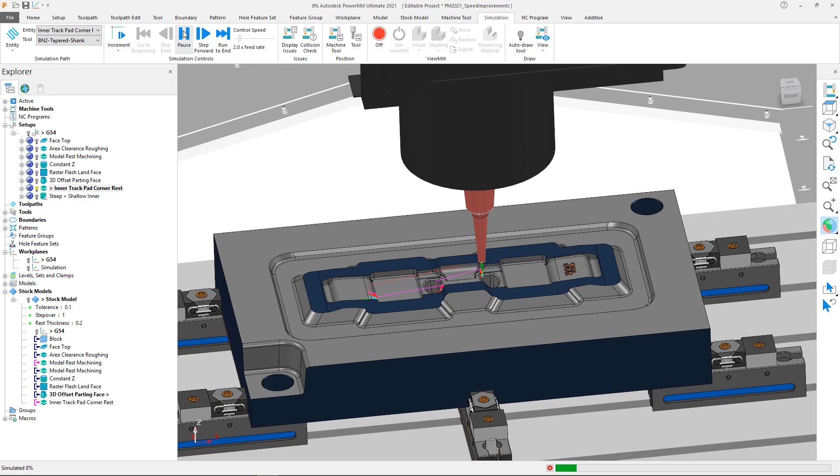For this example, we will be using a simple forging die for a trackpad, the size of which is 600mm in X by 350mm in Y by 96mm in Z. And in this project we have 8 toolpaths in the setup, 3 of which we will be calculating in this tutorial in order to compare their performance.

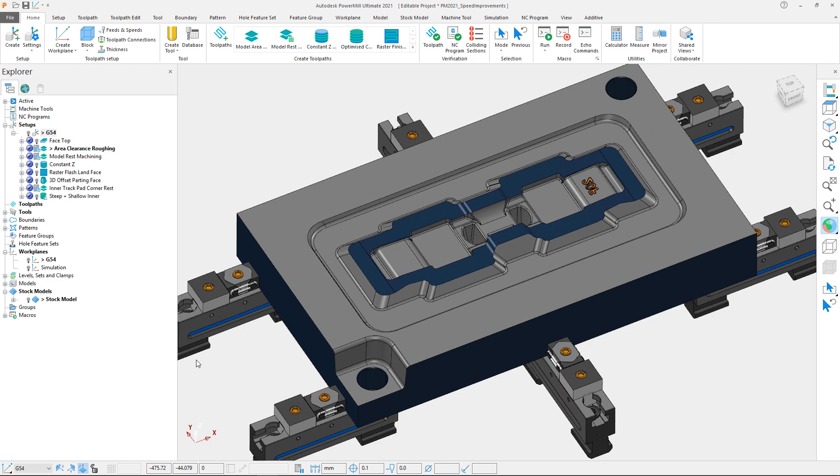We will be making a side-by-side comparison between PowerMill 2021 and PowerMill 2020.0. In this instance, both versions have been run independently on the same Lenovo ThinkPad P71 workstation laptop, which has a quad-core Intel Xeon E3 processor, 64GB of RAM, and an NVIDIA Quadro P4000 graphics card. Here we have both versions of PowerMill. Version 2020 is on the left, and version 2021 is on the right.

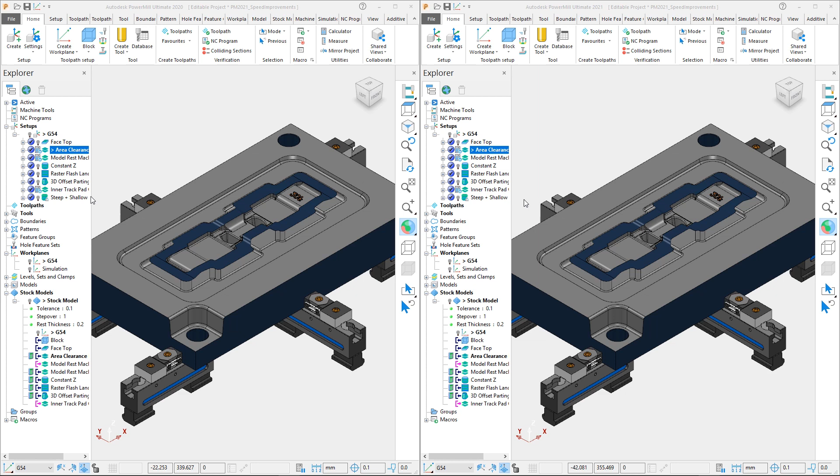Let's look at the first toolpath. In this case, we will start with an area clearance roughing operation. We will access the settings of the toolpath and go straight to calculating it. We are using a 30mm diameter tool with a 2mm tip radius and an offset all style for this roughing operation.

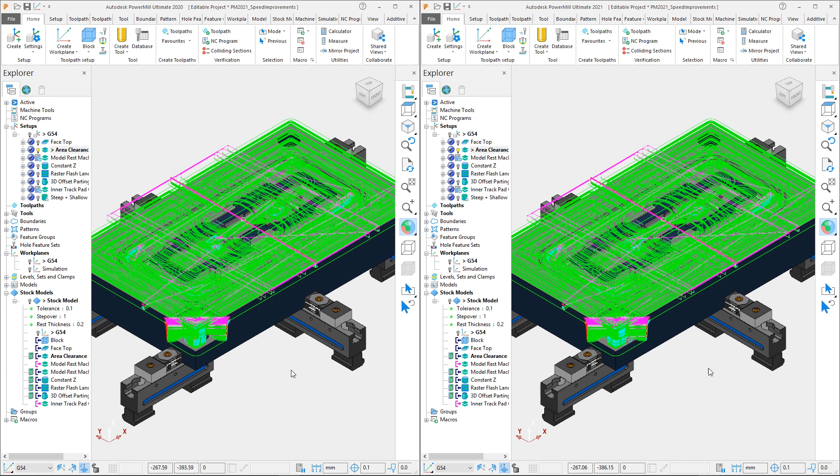Obviously, in the context of a tutorial, this has to be a relatively simple part, but even with this quick roughing operation there is a difference in calculation times. PowerMill 2020 took 14 seconds to calculate, whereas PowerMill 2021 took just 11 seconds, a saving of 21%. Let's move to the next toolpath, access the settings and start the calculation.

This time we have a rest machining operation, which is using a 6mm diameter tool with a 1mm tip radius and is referencing the previous roughing operation through the use of a stock model. We have the same step-down value, but are reducing the amount of material on the part from 1mm to 0.2mm.

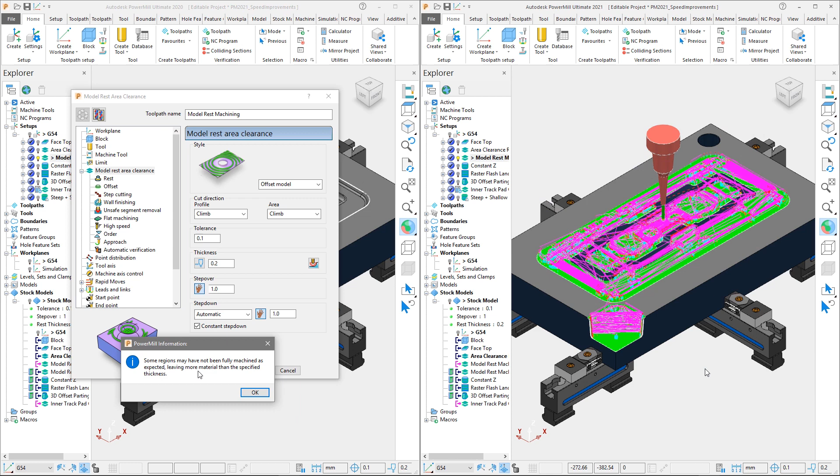As we reach the end of the calculation, PowerMill will warn us that some areas remain unmachined, and this is simply because the tool is a little too large to machine all of the rest material. We can close this message. Again, we can see an improvement in the calculation times, with PowerMill 2020 taking 68 seconds and PowerMill 2021 taking 57 seconds to calculate. Whilst closer, the result still represents a 16% saving in overall calculation time.

We'll move to the final uncalculated toolpath, access the settings and calculate. This is another rest machining toolpath, but since we have now added some finishing operations to the outer regions of this forging die, we need to calculate the changes in the stock model. We are using a 2mm ball nose tool and are limiting the toolpath to stay within a rest boundary to tackle most of the remaining material to be roughed. So we must calculate a stock model, rest boundary, and then the toolpath itself.

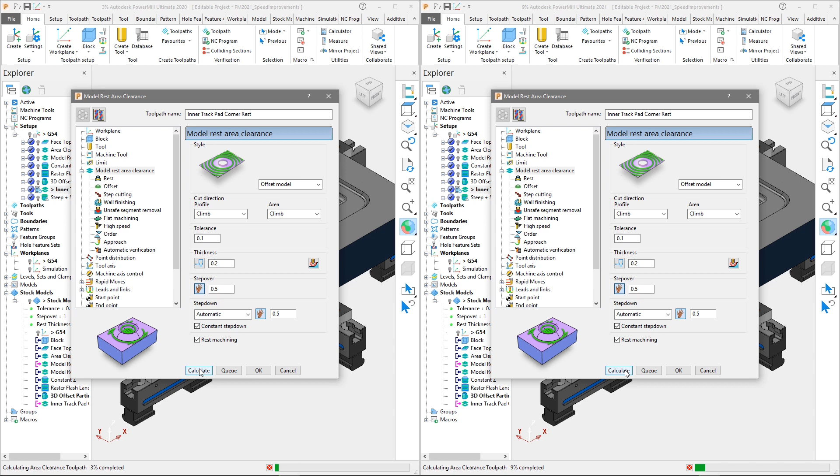PowerMill will again warn us that some areas remain unmachined, but we can close this message. Once again, PowerMill 2021 leads the way, taking just 44 seconds to process this operation, with PowerMill 2020 taking 67 seconds, representing a 34% time saving.

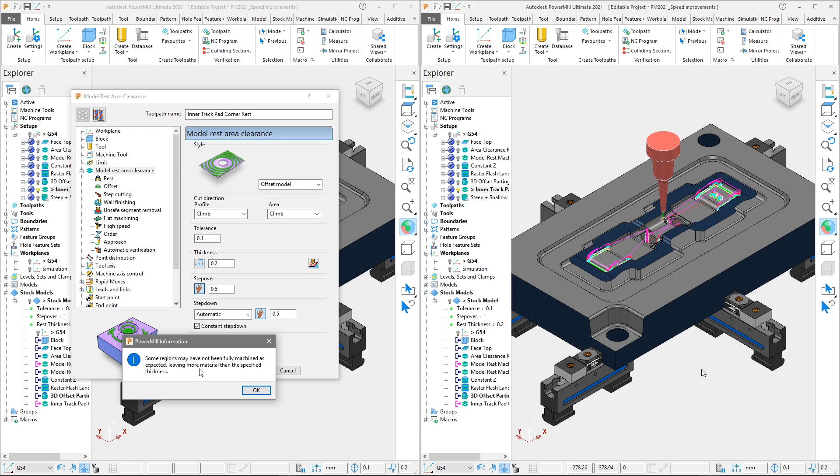Summarising the results in this test, we can see an overall improvement of 37 seconds, saving 25% overall, showing that on more complex parts the time savings could be significant. Overall, these improvements in calculation performance will minimise your programming time and help maximise your profitability.